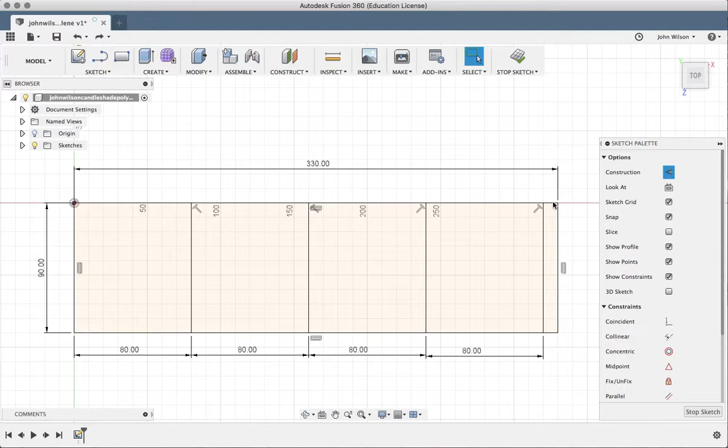Okay, so we're going to now put in the holes that we're going to need at this end and this end, so that when the whole thing wraps around, we can connect this end to this end. This is our tab or overlap.

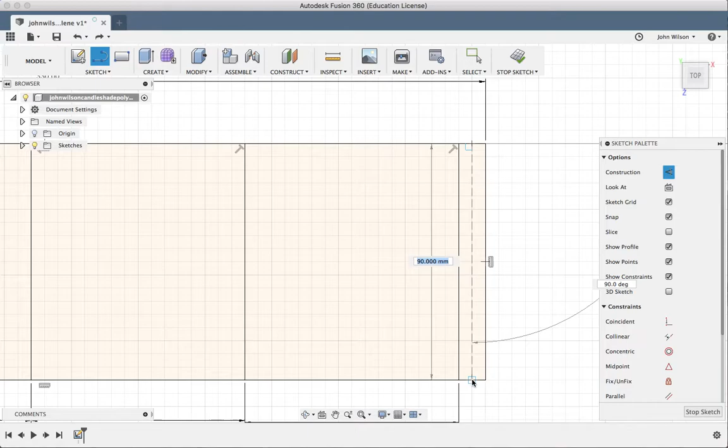Okay, so I'm just going to zoom in to this area here a little bit, and I'm going to press the L for line key. I'm also going to press this tab here, which says construction, and what that's going to do is put me in a line that is dotted. As you can see, it's a construction line.

So I want to just check that that's positioned correctly. The distance from there to there should be 5 millimeters. Now you can see on mine it is already, but if it isn't, just type 5 into there, press enter, and make sure that's at 5 millimeters.

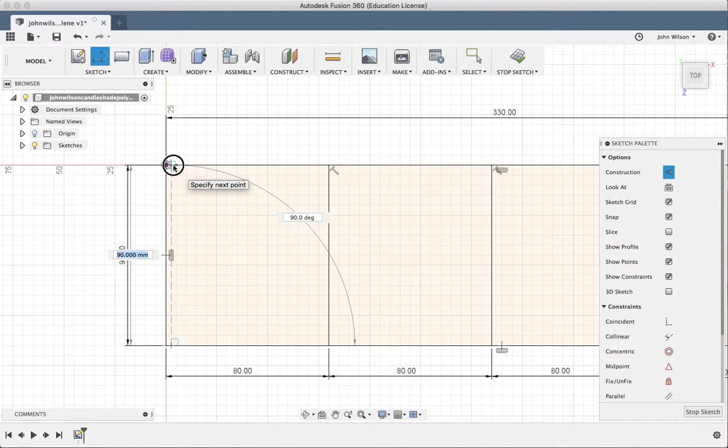Okay, now I'm going to go to the other end, and I'm going to do something pretty much the same. So let's put in a line here. It's drawing me a construction line because I've still got that ticked. Until I untick it, it's going to keep doing those.

Let's just zoom in and use my dimension button between those two. Now you see on this one that's clearly not 5, so I'm going to change that to 5, and that's going to shunt that across to there.

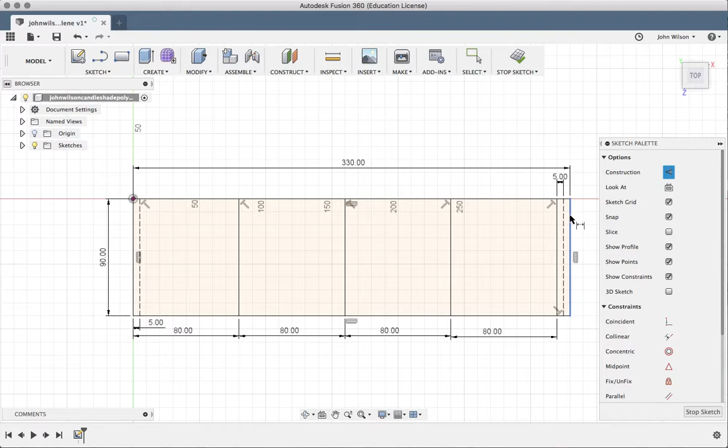Okay, so those are the first 2 lines to do. It needs to be in 5 from this end and in 5 from this end in order for those to line up perfectly. We then just need 2 horizontal lines.

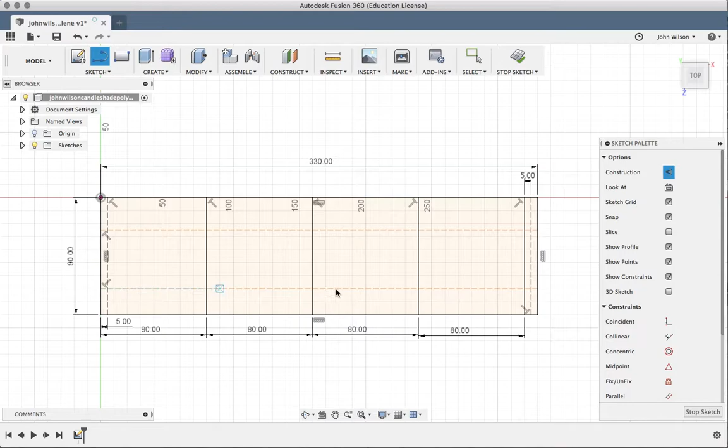So I'm going to take a line from there somewhere across to here - let's do that, another construction line. And then I'm going to take another line across from there to here somewhere. As long as they're horizontal, doesn't matter what the distance is because we can set the distance now.

So if we press D for dimension tool, pull that out, and that one is actually right - let's say 20, 25. Let's just see what 25 looks like. 25, I think. Yep, let's stick with that.

So then I'm going to take my D for dimension tool, move on to the next one. That's close to 25, but it's not - it's 24 point blah, blah, blah. So 25 and enter. Now I'm just looking at that and thinking if that spacing is right.

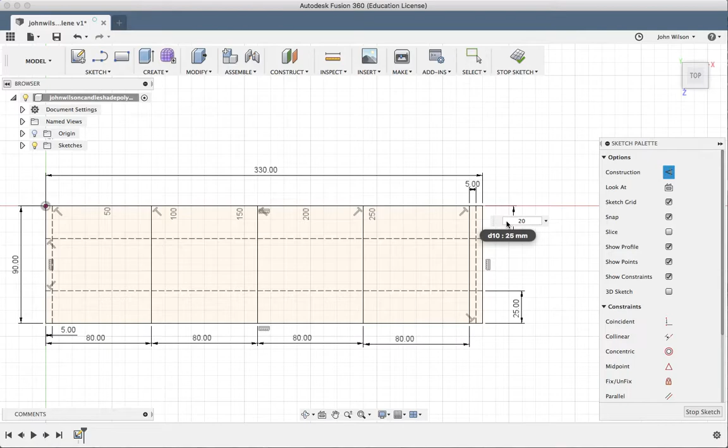Maybe if we change those for 20 - 20 might be better, let's go with that. I'm happy with that, all right, so we'll stick with 20. Now, what that's done is it's basically given us the positions that our circles can go onto.

So I'm going to zoom in here. Okay, now at this point, we want to draw our circle exactly. So C for circle on your keyboard. I want to put it exactly on that center point where those 2 lines intersect. Click and pull out, and it's going to be 3 millimeters.

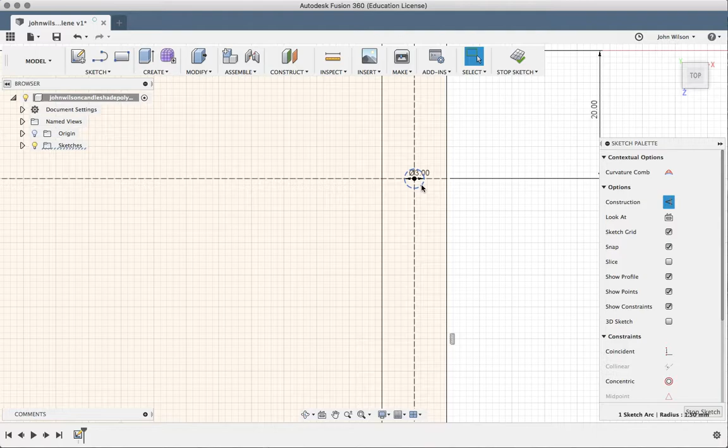But I've forgotten to turn that off, so I actually want that line not being a construction line - I want it being a solid line. So just turn this off because we're now back to drawing solid lines. C for circle, pull that out, 3, enter, enter.

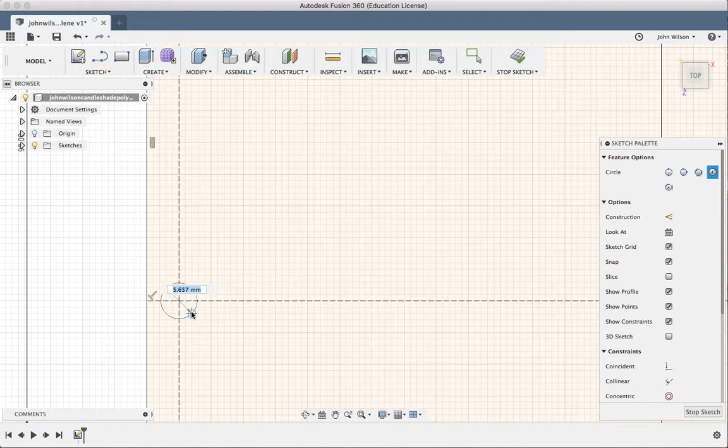That's that one there. Scroll down, zoom out, scroll down, zoom in so you can see where those lines intersect nice and easily. C for circle, pull out, 3, enter, enter. And same down here, C for circle, 3, enter, enter.

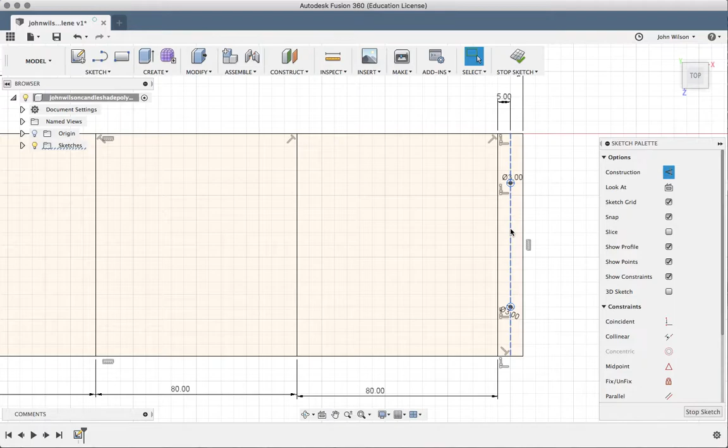Okay, and you've then got everything you need for drawing up your decoration, if you like. I'm going to delete these lines because they've now served their purpose - construction lines are really helpful, but you get too many lines flying around, things can get a bit cluttered, you get a bit confused with what you're looking at. So there you go, just cleans that up a little bit.

So that's our lines on the end, and in the next tutorial I'll just talk to you then about the shapes that you want to put into these areas here. Okay, so there you go, well done.